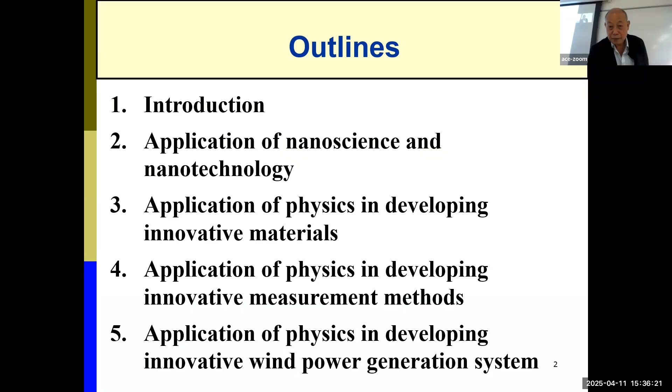Okay. So we know many English words come from Latin and Greek. Physics is from ancient Greek, and the meaning is knowledge about nature. Of course it is a natural science, not a social science, and specifically it studies matter and its motion through space and time. So physics is mostly related to energy and force.

We know that big achievements of human beings come from theoretical breakthroughs in physics. Here are a few examples. The electromagnetic theory let us develop TVs, computers and electricity generation, from the fundamental understanding of electromagnetism. For nuclear physics, with good understanding we developed nuclear weapons, and also nuclear power plants. And recently we have so-called man-made fusion reactions of atoms. For mechanics, we have calculus, based on developments in physics.

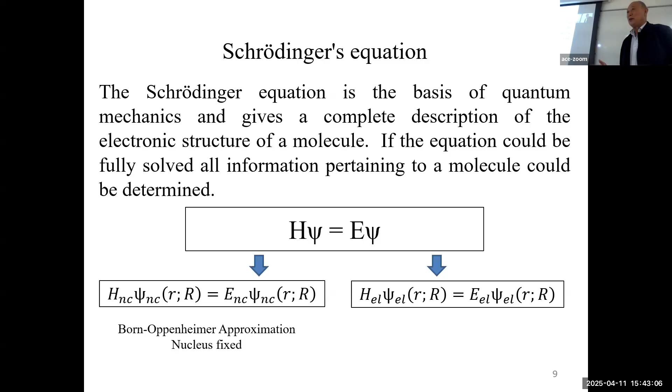So for the atom, we can divide this equation into a part regarding the nuclear core and another regarding the electrons. Compared with the electrons, the nuclear core is huge and very stable. So most of the calculation is focused on the electrons. However, there's still a problem even if we separate the nuclear core and the electrons, because the wave function is a function of 3N variables, where N is the number of electrons.

So it's very complicated. Over many years there were many methods, using matrices, but they could not give a very good solution. Until, in the 1960s, a new theory was developed, called density functional theory. This theory simplifies the electron calculation into the electron density. In this case, you reduce the 3N variables into 3 variables, x, y, and z. Of course, we ignore the spin of the electrons here.

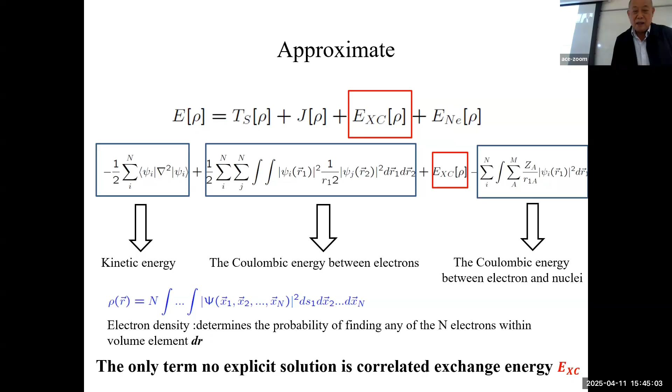When we calculate the energy, we divide it into 4 parts. Three of the parts are the kinetic energy and the interaction energies between the electrons, and the only unknown is EXC. So we have to resolve this so-called exchange-correlation energy. There are basically 2 ways, one local, another more global: we have LDA and GGA. So there are 2 approaches to solve for EXC. Once EXC is obtained, the problem is resolved. So this is some very fundamental knowledge.

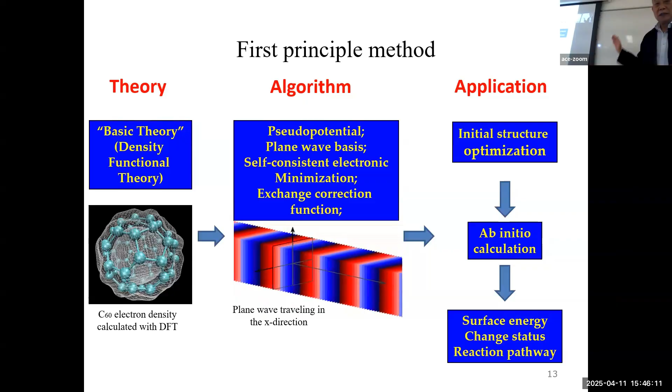Currently, we can use the theory called DFT, and then use some algorithms, including plane waves and exchange-correlation functions, to get the initial structure optimized, and then we use the ab initio method to do the calculation. Finally, we can get the surface energy, transition states, and the reaction pathway. So this is the route for us to use quantum mechanics.

Specifically for civil engineering, we are mainly concerned with how to establish the CSH using atomistic structures with ab initio simulation. We see this cement component, especially C3S, which is calcium silicate. When it mixes with water, the water will be attached on the surface - we call this adsorption. After adsorption, the oxygen in the water will pull the calcium ions from this C3S, and meanwhile some hydrogen or protons get in, so we can form CH in the solution and CSH on the surface of the C3S.

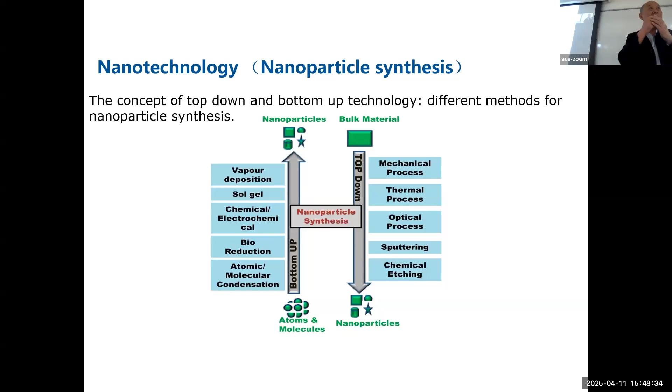That's about nanoscience. Now we talk about nanotechnology. In nanotechnology, one of the big tasks is to produce nanoparticles. There are two ways to do this. One is top-down: you have a large size piece, and use mechanical, thermal, optical, or chemical methods to change the large size into a very small size - we call this top-down. The other is bottom-up, where you start from atoms and molecules, also using chemical methods, to assemble atoms and molecules into nanoparticles. So basically we have these two approaches.

How about for concrete engineering? We say concrete can be nano-engineered. When we talk about engineering, that means you do something on purpose. So nano-engineered means we do something at the scale of nanometers. How do we do this? Usually we can use a nanoparticle, and then use that to react with the hydration products. After the reaction, we will change the material structure from the original hydration material structure. With this change of material structure, we can improve the mechanical property. So basically nano engineering for concrete is doing things like this.

Currently we mainly have nanoparticles such as nano-silica, nanotubes, carbon nanotubes, nano-titanium, graphene, and also monomers. Monomer is the organic material before polymerization - it's very small in size. We'll give one example to illustrate this.

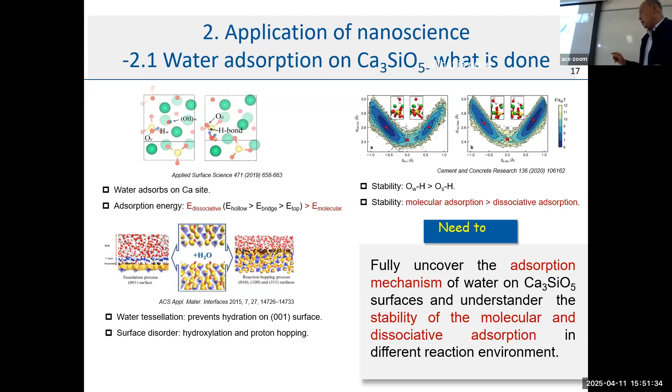Now, as I said in civil engineering, one of the big targets of nanoscience is to reveal how CSH is formed. For the formation of CSH, there are many steps. The first step is when water contacts the cement particles, the water molecule will be adsorbed on the surface. There is much research on this, but it's not very complete. In my group's study, we are trying to fully uncover the adsorption mechanism of water on the C3S surface and understand the stability of molecular adsorption versus dissociative adsorption. I will talk about this.

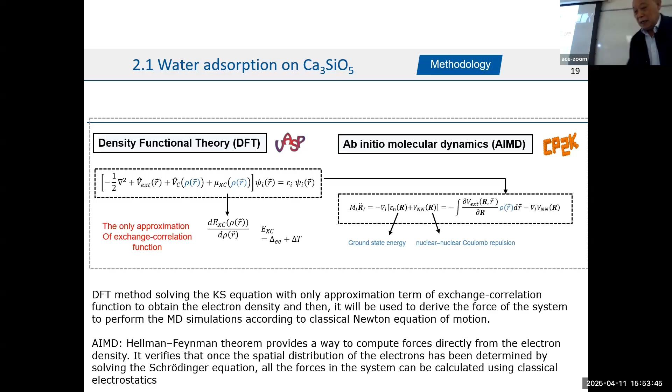As I mentioned, we utilize quantum mechanics. However, to increase the number of atoms, we extended this into MD, molecular dynamics. We utilize DFT, with software called VASP. We use that to get the potential. This potential has the accuracy of quantum mechanics. So we use that potential in the MD simulation - we call this AIMD, or ab initio molecular dynamics. This means more atoms can be put into the system, but you still have the accuracy of quantum mechanics. So by utilizing this, we first studied different types of adsorption.

Dissociative adsorption means the water molecule is separated into H and OH, and adsorbed separately on this surface. Molecular adsorption means the whole water molecule is adsorbed on the surface of this C3S. So we have already studied what is the strong adsorption or the weak, and what characteristic it has.

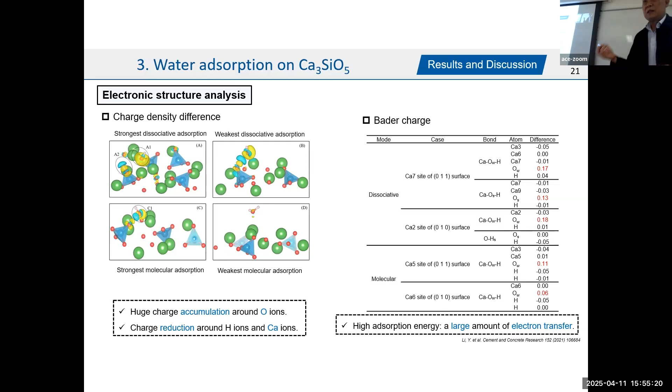I use this the right number listed here. So this is a fundamental mechanism for this.

And then we can see for the adsorption of the water, basically after it clicks on the surface, there's a change in the energy, but this overcomes this energy barrier, and then you can move to the next step, and then finally you got the molecule adsorbed on the surface. So after that, we studied the dissolution of this calcium into the liquid.

So the dissolution of the calcium, well, we can see, for example, we know that the limestone, if you go to the cave, you know there's a dissolution. You have the water drop with the calcium inside, and that's how it formed this. And we have the drug release. There's many things regarding this.

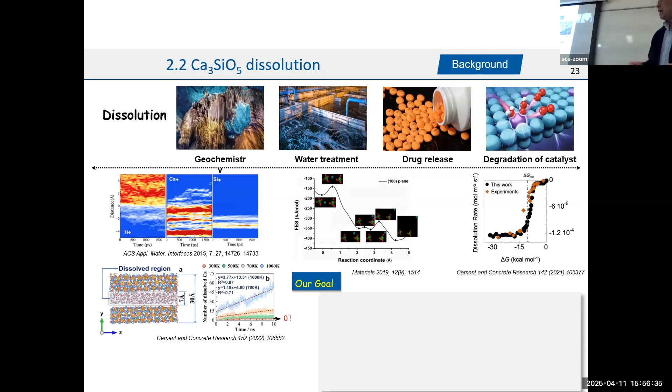However, what we are trying to do is for the cement material. So we want to simulate this complete and more realistic process of calcium dissolution from this C3S surface, and then we quantitatively calculate the thermodynamics and kinetics properties of this.

To do this, in addition to these two software, one is CP2K, we need one more, because for CP2K, they cannot pass this higher energy barrier. So we need a so-called metadynamics, meta D.

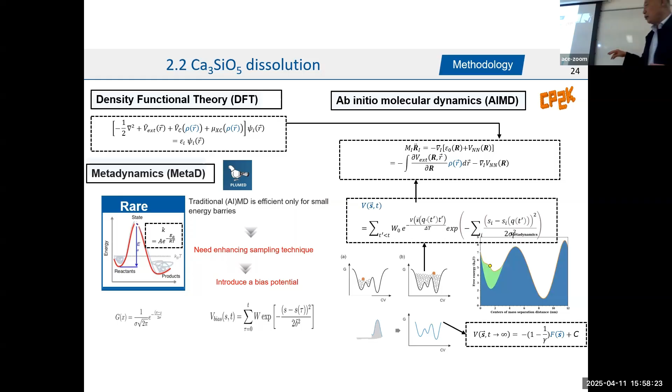So in this metadynamics, there are two things. One is the sampling rate - they increase the sampling rate, so every smaller delta they have is the sampling. And the second, they provide a so-called bias potential and put this potential into the AIMD. So with this bias potential, originally, for example, you have the ball in the valley that cannot cross over this peak, but with this bias potential, the reaction can happen, so they can go cross this energy barrier.

Calcium alpha means there are still three oxygen from C3S connected with calcium, and the rest is from the water. So we can calculate from a different state.

So here you can see we go from A to B. So from there you can see originally it has three oxygen from the C3S connected with the calcium, and two from the water, and then after they cross the barrier between A and B it becomes stage B - they have one more oxygen from water. Gradually you have an increase to four, and then the connection of this oxygen from C3S with the calcium reduces to 2 and reduces to 1, finally dissolved.

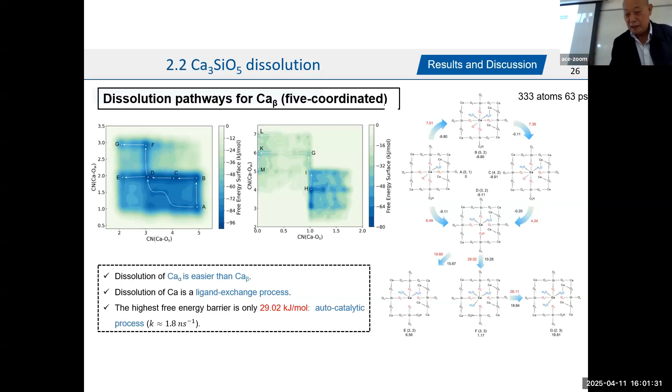And this graduate mentioned, from adsorption, there's a connection with the oxygen from the water, and with the increasing connection of oxygen from the water, the bond between the oxygen from C3S and this calcium breaks, and finally they move out. So this is the process.

So after this calculation, based on my understanding, the CSH should be formed on the surface of the cement particle. We have a lot of examples from experiments. For example, this is a photo from one of my students from HKUST. He took a very nice image after hydration, where C3S particles are still there, and outside we have so-called internal CSH, and outside that is outer CSH.

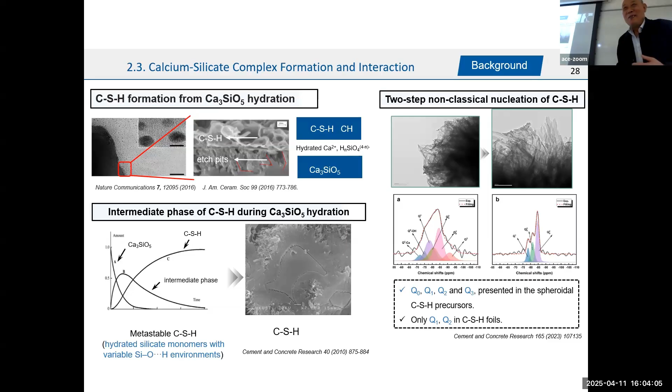So there's some TEM, they change from this. According to the arrangement, my students tried doing the calculation concentrating on the C3S surface, but it's very difficult. So my students at that time got another way - he did the calculation for the assembly of calcium and silicate.

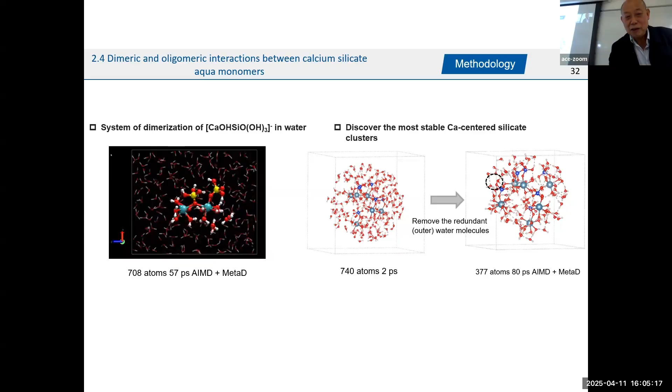There's a meaning here. We know we have the so-called secondary formation of CSH, the pozzolanic reaction. In that case, it's exactly like this - you have an assembly of calcium and silicate. I said your work is also good, but not really for the CSH formation on the surface. So he did this, and also found two very stable combinations of calcium and silicate, and also they continue to let this combination of silicate and calcium join together to form the so-called secondary CSH.

This part I'm going to utilize because currently we need to reduce carbon dioxide. One way to reduce carbon dioxide is to eliminate Portland cement. But if we eliminate Portland cement, we need a binding material. So we can get calcium and silicate from natural sources, and also from industry waste, and then use this reaction to form so-called secondary CSH. This is still good, but I still ask my student to continue to work on the surface reaction, so that will be more realistic for the formation of this.

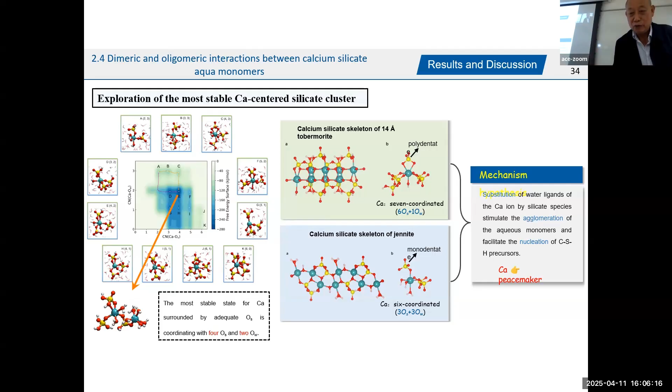Now I move to nanotechnology. At the beginning, I said there are many ways to get a nanoparticle. How about for our civil engineering - can we have some innovative method to get nanoparticles? The answer is yes, very simple.

You put cement particles into a large amount of water, and then control the environment of this reaction - for example, temperature very close to zero. And then we found the cement particle can release the calcium ion, just like we discussed earlier, and finally they can form very small calcium hydroxide - about 5 nanometers, and very uniformly distributed in the solution.

Very good, and we tried this with magnesium, and also found a similar phenomenon - we can get about 2 to 3 nanometer particles from this magnesium. So we said this is a reliable method, and we can use it to produce nanoparticles using common cement particles. And this is very cheap, very simple operation.

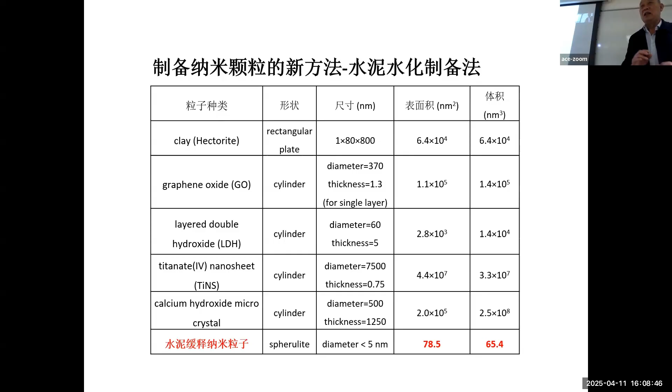So someone asked, if you got this, do you have any big advantage? So we compared with other nanoparticles, and we found the surface area is the smallest, and the particle volume is the smallest. That means for the same volume, we have more of this cement-produced nanoparticle - more particles, and more effect in restraining or reinforcing the material.

So we are utilizing this generated nanoparticle. First we did research to produce a material called hydrogel. The hydrogel is basically a kind of polymer with water - about 80% water, 15 to 20% polymer. Before this polymerization, we utilize the monomer and initiator, and let them combine with the generated nanoparticle. So we produce this kind of hydrogel.

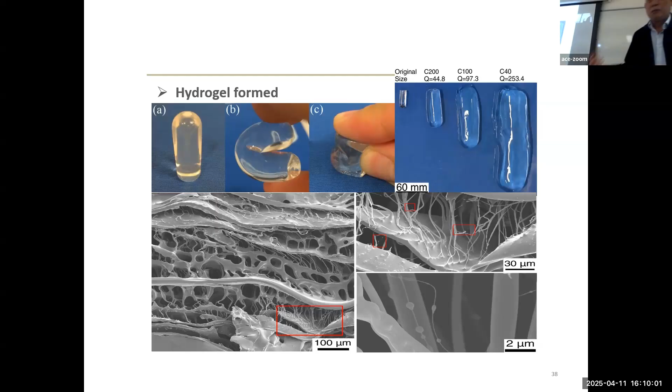And these are some photos. You can see it's very transparent, and the microstructure is great. You can also find some in the strings, some small ones. You see the joint? This joint is made by this nanoparticle. It is amazing. Okay, after we utilize this nanoparticle to reinforce this hydrogel, the mechanical performance is exceptionally good.

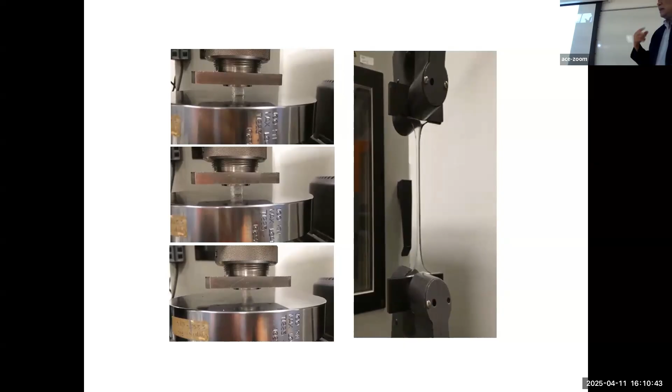So on the compression side, we have three. The top one is hydrogel without any nanoparticle. The middle one is with nanoparticles we purchased from a commercial source, so this is kind of inorganic. And the bottom one is the hydrogel reinforced with our cement-generated nanoparticle.

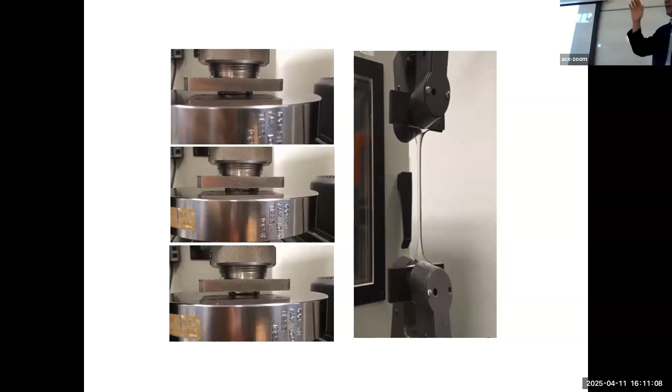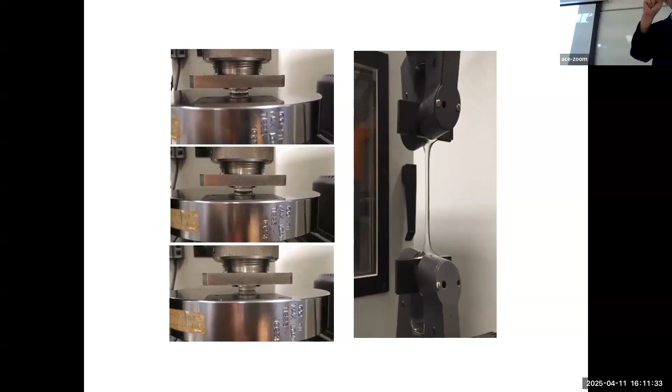If you pay attention, for the top one, when you compress, it becomes very thin, but when you remove the force, it cannot recover. That means it completely lost its elasticity. For the second, after removing the force, all the hydrogel was broken. It's very brittle. Only the bottom one, after you remove the force, recovers to the original shape. So that means it has very good elasticity.

And for the tension side, we found the maximum tension can be 100 times the original size. You can see it's without breaking. So this is very good elasticity.

We have an article published in Nature Communications. We compared with hydrogels reinforced with other nanoparticles. You can see with our cement-produced nanoparticles, the amount we utilize is small, the strength improvement is almost the highest, and the elongation is the highest. So that means we have good results utilizing cement-produced nanoparticles to reinforce the hydrogel.

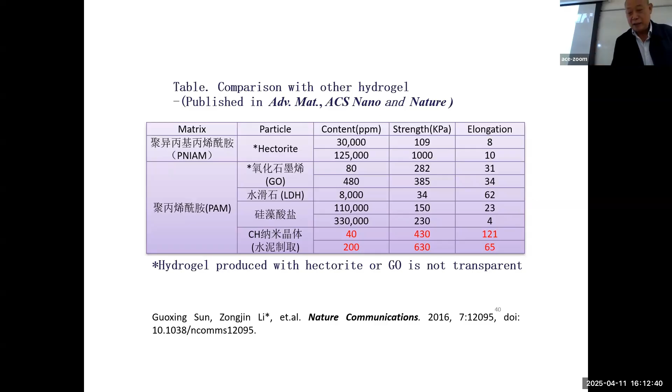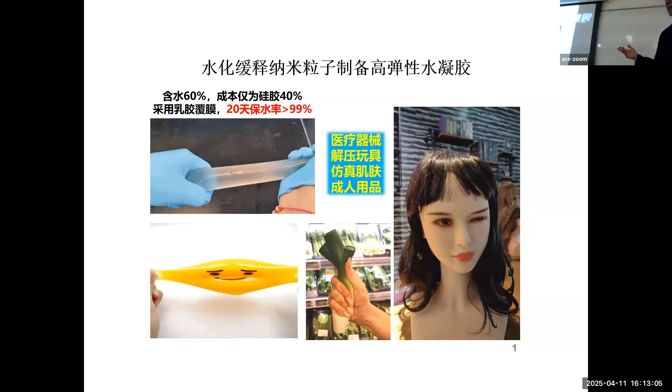So currently we are utilizing this kind of hydrogel for applications. One of the applications is medical and also some adult products. In Dongguan and elsewhere, there are factories that produce these. Currently they use some other material, and what they found is our material is much cheaper and has better elasticity.

And another, we use this hydrogel to produce a super absorbent material. The highest absorption for the hydrogel we produce with this nanoparticle is 13,000. That is the highest we found in the literature, about 2 or 3 times what was reported.

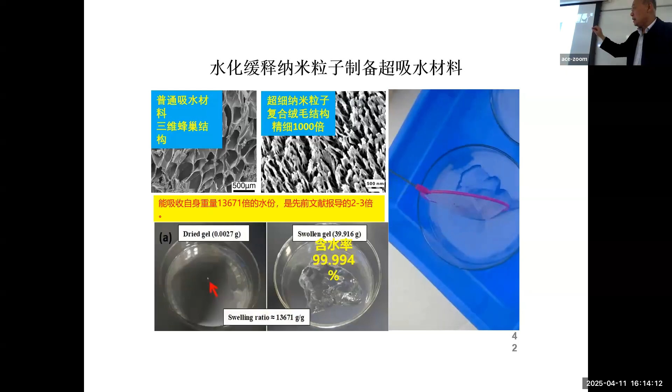So why can it have this? Because of the microstructure. You can see they have a very special kind of villi and something like hair growing on it. That helps the absorption.

So one application is that we can use it for soil improvement. We put in our generated hydrogel, the commercially available gel, and some without treatment. You can see our hydrogel keeps about 40% of its water in 6 months, but the others don't.

And also for the plants, without the hydrogel, it's basically very difficult for the seeds to germinate. With the commercially available one it's only about 40%, but with our modified hydrogel it's about 100%. So this is that.

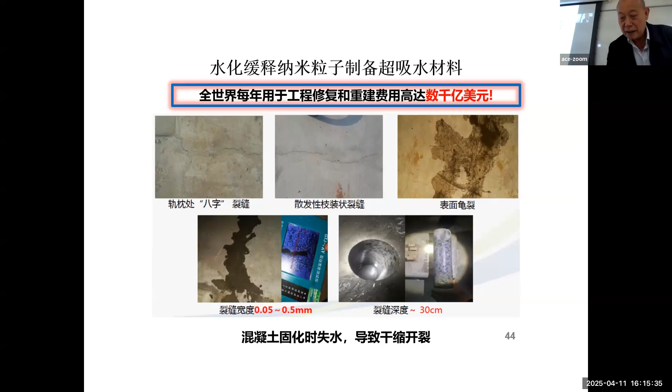And also we utilize this in our concrete, as an internal curing material. Because this material works not only for fresh water but also for salt water, it can absorb about 300 times.

So that's good. We did tests on concrete blocks. At 2% addition, the final strength loss is only about 9%, but for the commercial products it's about 20. And also we can reduce the shrinkage by 20%. The commercial products only 5.5%.

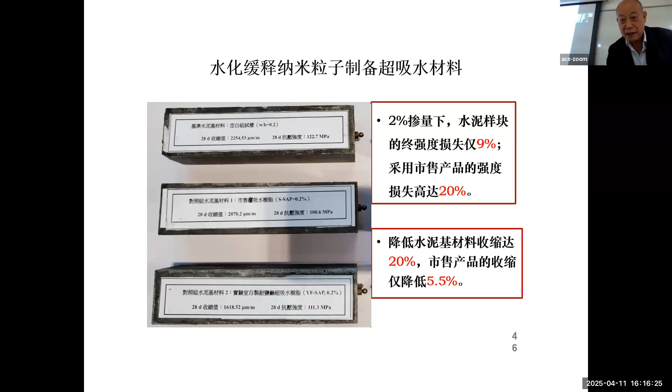So we are currently also pushing the application of this in the home. And also we utilize this kind of gel to produce other products for applications.

For example, we have this heavy metal adsorption, and use this for non-contact transducers, and we have this kind of high elasticity, but with oil replacing the water, for applications like base isolation, and we also use that for the growing of cells. So the result is also good, because it can be a soft organ for the human being. Okay, so this is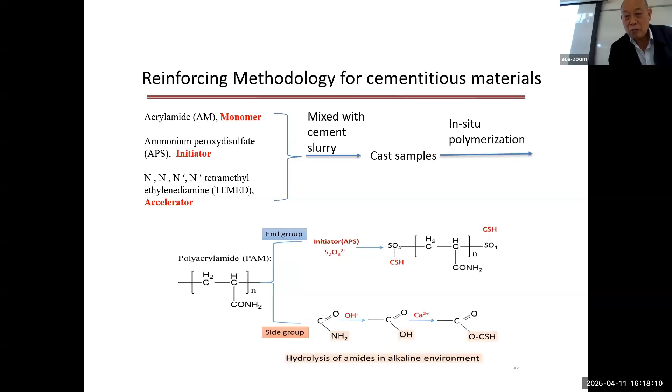Now on the other side, we used nanoparticles to reinforce the hydrogel. Now we use that to reinforce our cement-based material. So we did the same thing. We put the monomer, initiator, accelerator, and we mix with the cement slurry and cast samples. And during the hydration, we expect an in situ polymerization to happen, and then it can form a second network in the cement-based material. This is one of my students' PhD thesis. What he did was use 0.3%, 0.6%, and up to 5% of the monomer.

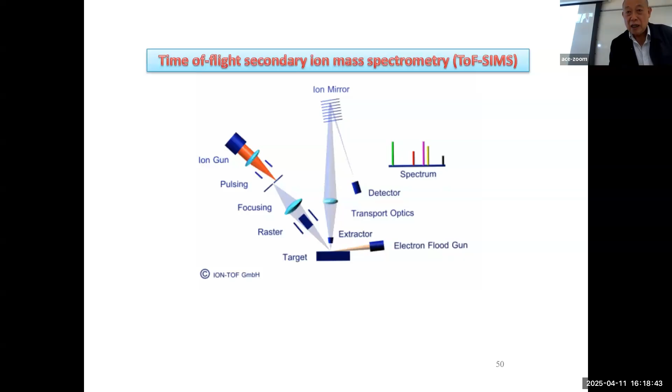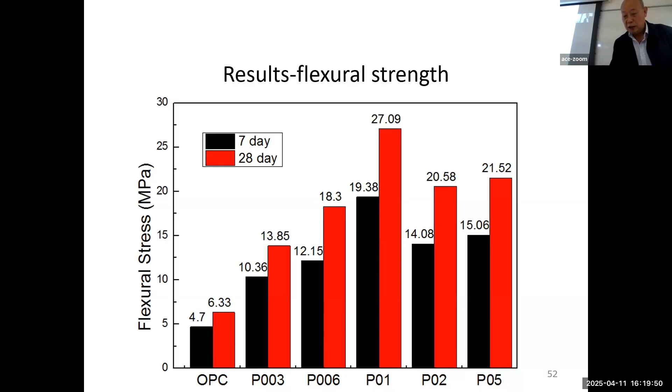And then we did the flexural test. You can see the best result we obtained is about 27 megapascal at 28 days, and for the reference it is only 6, so it's very high. And meantime, there's not much reduction in the compressive strength.

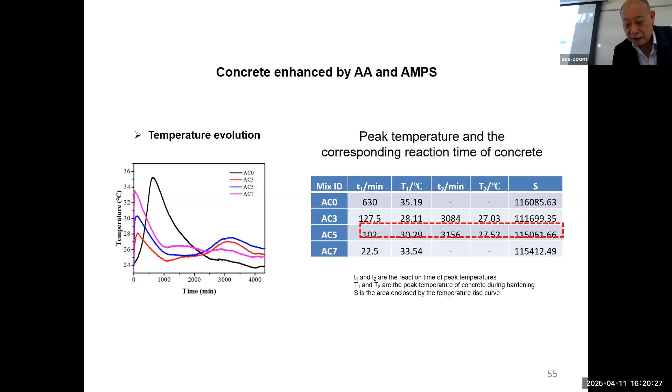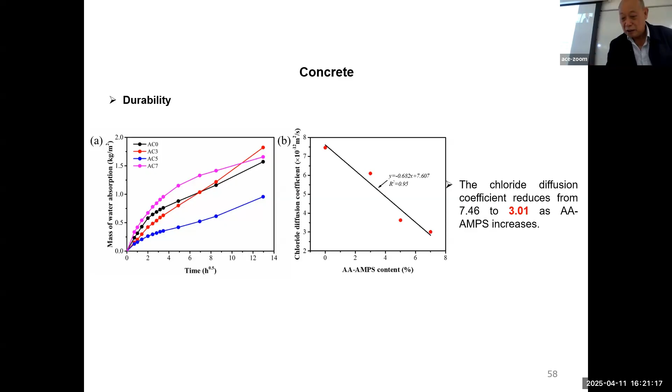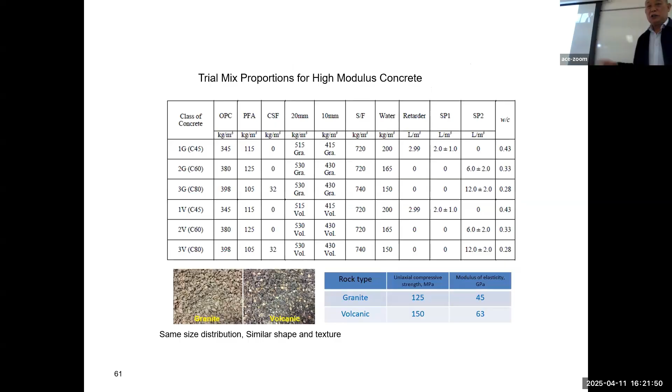Okay. So next I'll talk about high modulus concrete. This is one I did at HKUST. What we did was add nano silica into the concrete. We tried to produce concrete with high modulus. We started from this commercial mix design. This is from the government. At that time we were the partner. And then we modified that formula into this high modulus concrete formula.

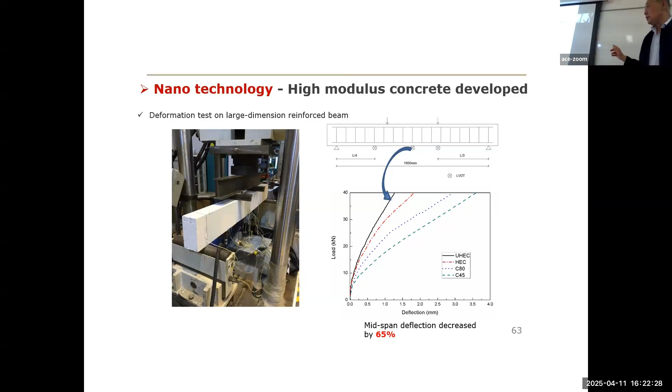And then what we found, by adding these nanoparticles, you can enrich the transition zone, and you can increase the modulus to about 53.5 gigapascal. And if you do the structural test, the beam midpoint deformation for the high modulus concrete is about 1/3 of the normal concrete. So here is a video.

Construction of tall buildings is an unstoppable trend all over the world in recent several decades, especially in Hong Kong. In 2017, Hong Kong is ranked #1 city by number of 150-meter or higher completed buildings, 25% more than the second, New York City. One major driving force is the limit of available land. Therefore, the city expanded vertically, which requires a rigid structural frame to sustain lateral loadings like wind loads. If we look at the materials used for construction of tall buildings, 85% are using concrete.

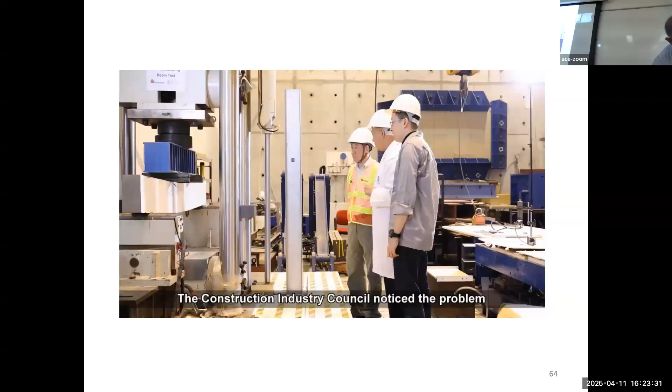When designing tall buildings, structural engineers have to use large cross-section area of beams and columns to control the structural deformation. The Construction Industry Council noticed the problem and spotted the significance of concrete technology. They sponsored a research project on the development and application of high modulus concrete by Gammon Construction Limited and the Hong Kong University of Science and Technology in 2013. Concrete has two important properties. One is the strength, especially the compressive strength. Another is the stiffness. Relatively, it's easier to develop high-strength concrete, but not high modulus concrete.

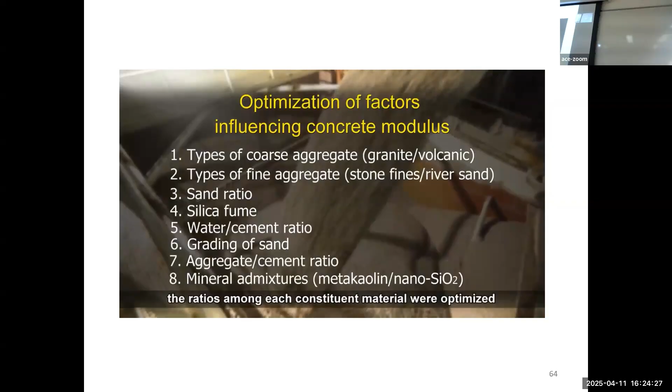However, concrete modulus increases to a much less extent than compressive strength according to the Code of Practice for Structural Use of Concrete 2013. This study is quite challenging. The first stage of this innovation is to optimize mix proportions for high modulus concrete. A new type of crushed rock aggregate was identified, and the ratios among each constituent material were optimized.

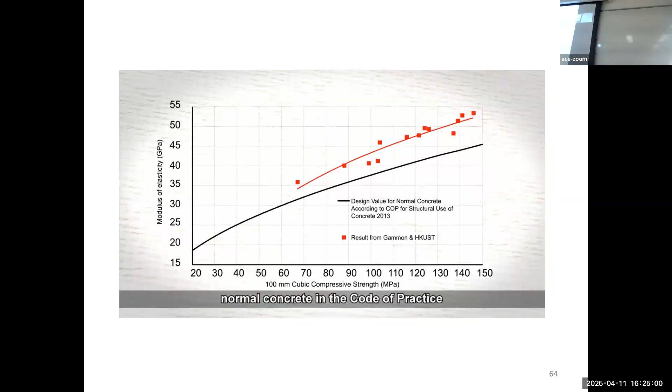To improve concrete properties and enhance mixing efficiency, ultrasonic mixing technique was firstly applied in producing concrete. It is clear that the interfacial transition zone between aggregate and cement paste becomes much better after ultrasonication during mixing. High modulus concrete, developed by Gammon and HKUST, has 20% higher stiffness than normal concrete in the Code of Practice. Therefore, up to 20% materials can be saved to maintain the original structural stiffness.

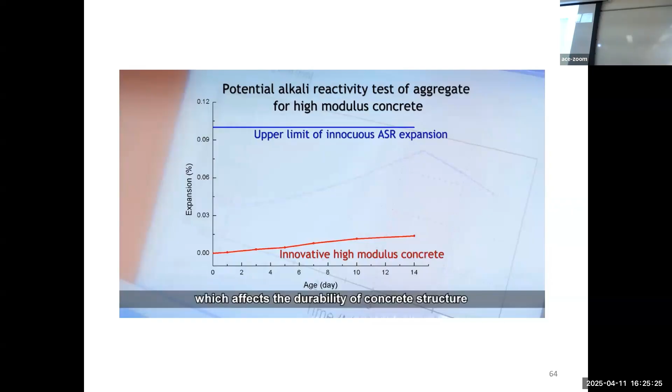It also shows excellent dimensional stability properties in both early age and long term. Shrinkage, creep, and weight loss all decrease compared with normal concrete. Besides, selected rock type does not have alkali aggregate reaction risks at all, which affects the durability of concrete structure. Large-scale beam test results indicate that high modulus concrete leads to near 55% reduction of mid-span deflection. It verifies the advantages of deformation control.

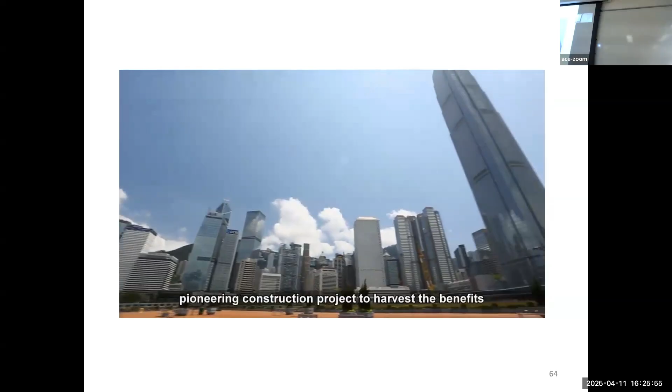High modulus concrete has proved workability, mechanical, chemical, and durability properties, and is ready for structural engineers' design and industry scale. CIC is also ready to lead us to carry out pioneering construction projects to harvest the benefits in the sense of sustainability and for a sustainable built environment.

In building design, we had to control deflection of the buildings. If we would like to use such kind of concrete, eventually the cross sections, such as columns and walls, will be greatly reduced, thus saving a lot. Overall, 15 to 20% materials can be saved if this high modulus concrete is utilized for tall buildings. It is bringing tremendous benefits to construction sustainability and will lead to an unprecedented revolution in construction industry.

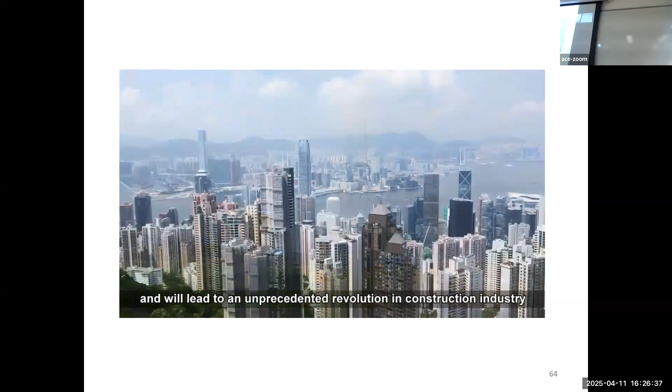So next we talk about how to use this physics law to develop the innovative material. So this is the so-called external wall system produced. Basically it is composed of two parts. One is inorganic reflective heat insulation coating. Another is a structural heat insulated wall panel with the addition of the PCM.

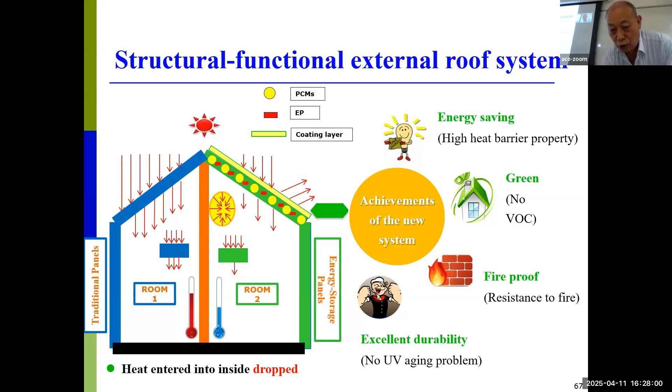So, for example, we produce a roof. First we have the coating: when the sunlight comes, most of the heat is reflected. And second, we have the panel with the PCM inside, so it can store some latent heat and reduce the heat going into the room, so we can keep the cool temperature inside.

This reflecting material we developed according to this equation. We have N1 T1 plus N2 T2 equal to lambda over 2. N is the refractive index of the material, T is the thickness. So when we design the material, if we get many layers that satisfy this formula, light with wavelength lambda cannot penetrate.

We have a 150 diameter concrete cylinder, made hollow inside with a 100 millimeter mold. Then on the surface we use different coating materials, and we use infrared to shoot and measure the temperature inside. The results were very good. The highest improvement we get is 41%.

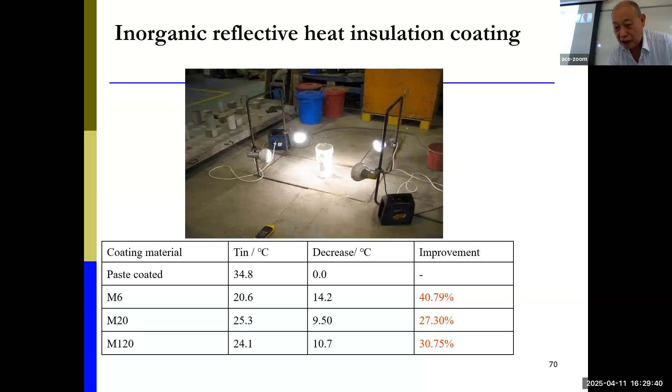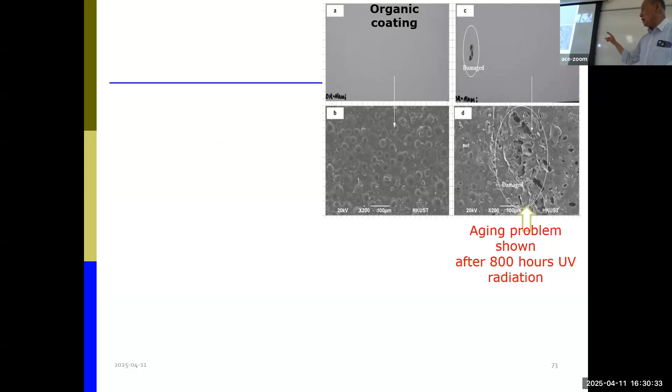They also showed the bonding between the coating material and the substrate, and we did the UV test. For the material with organic content, you can see it has very heavy damage after 800 hours of UV radiation.

But for our material, there's almost no change after. So we did some site tests. In Hong Kong, construction sites mainly use containers as the office. So this is on the construction site. We did a measurement, one with our coating, another without. You can see for about 3 months with the coating, about 552 kilowatt-hours. So that's quite good, the saving for that.

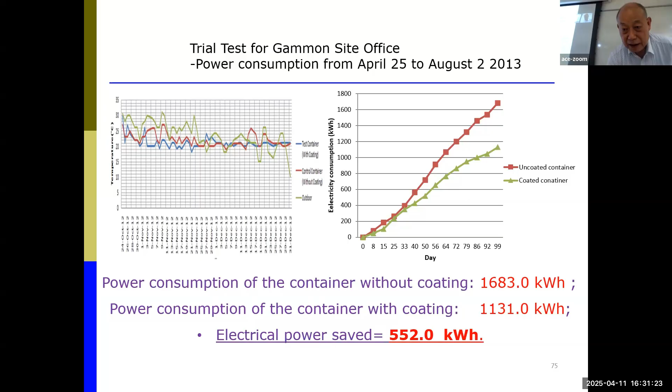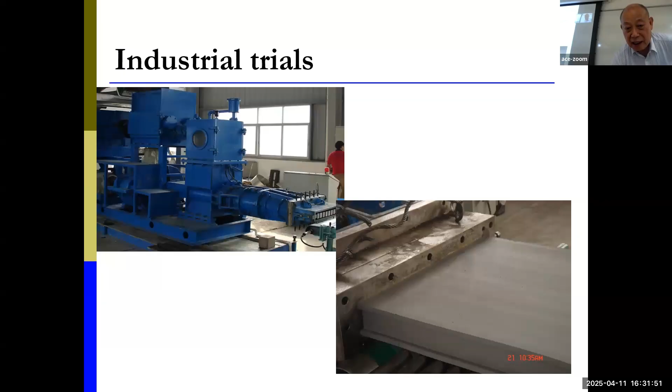And then we developed this kind of extruded material, and we add this PCM. You can see you can reduce the temperature difference between the internal and external. And also we have good bending strength, more than 2 megapascal. We had some manufacturer trials and did some design for the real structure, like currently for the MTR.

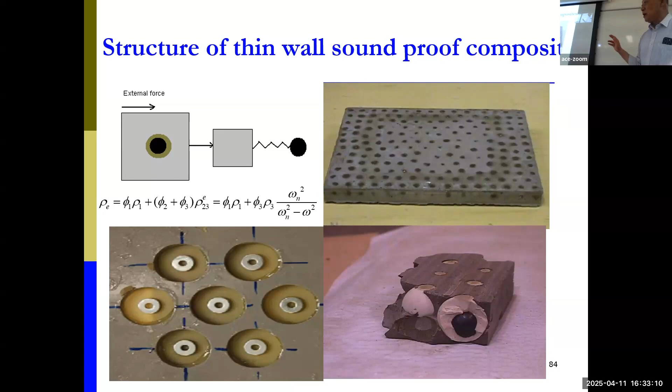Now we talk about the sound insulation material. We know sound is very difficult to block for low frequency because of the mass law. For low frequency, the thickness of the wall must be increased to block this kind of wave. However, at HKUST, we developed, according to physics law, a composite material, and with different compositions we can tune the effective density of the composite material. This density depends on the frequency of the penetrating wave. So by adjusting this, we can get almost zero or negative effective density, and then the wave corresponding to that frequency cannot penetrate according to this physics.

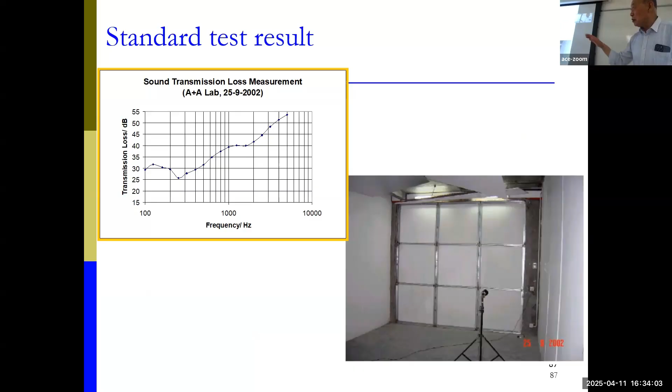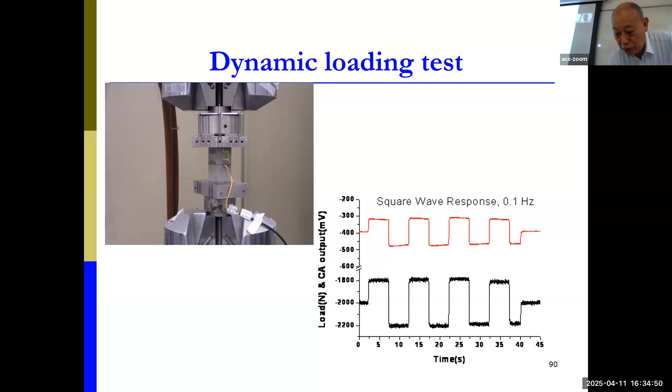Then we have the cement-based material. This work we also developed for many years. Basically, we use powder from piezoelectric material mixed with cement, and then we produce this transducer. You can see it follows the force very well. On the top, the red square is the signal output of the transducer, and the bottom, the black, is the force applied by the MTS. We also put the transducer into a reinforced beam, and used 4 different frequencies and 4 different amplitudes to generate this zigzag load pattern, and we found the transducer inside the beam can follow exactly the pattern of this loading. So that means it's very reliable.

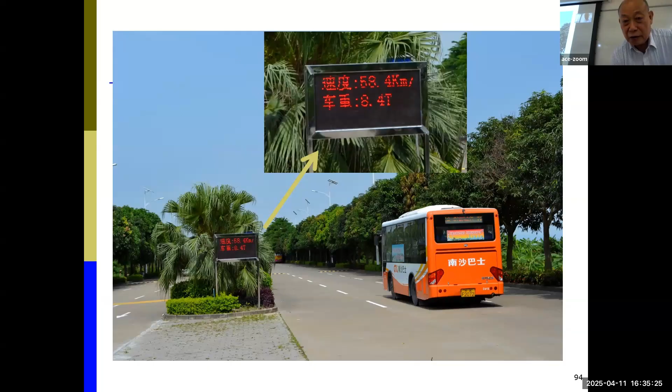And we used that for highway traffic monitoring, so when a vehicle passes through it can give the speed and the weight. And also we utilized this for high-speed rail crack detection, because high-speed rail has very long turnouts, 80 to 100 meters. So they are very afraid that any crack will create a safety problem. This project was originally with Xinan Jiaoda and PolyU, and they met a lot of difficulty. They called me, so I said, okay, we can use our transducer to try. And then we put the transducer on, and found it's really very good.

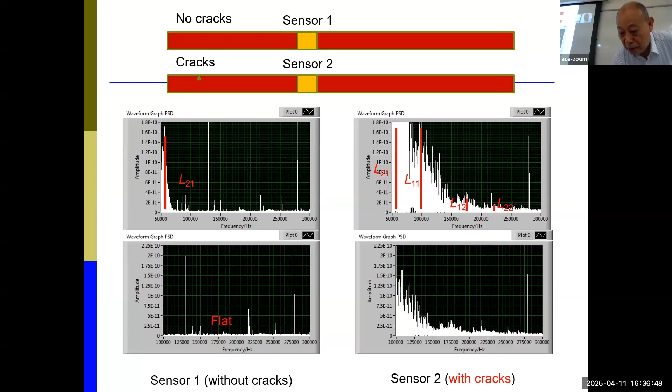For these two spectra, one is without crack, another with crack. You can see they're quite different. And then we utilize this L11 to indicate there's a crack. So finally, they passed the examination from the railway department, the Ministry of Railways at that time, before it became a company, and now it produces the product for application in the whole of China.

And this measurement is called non-contact resistivity measurement. Because sometimes we need to measure the resistivity of the concrete, because it's a porous material, and use the resistivity to interpret the concrete property. Before, it always used an anode and cathode, selected electrodes, and with this contact there's a lot of problems. At least you cannot get accurate results.

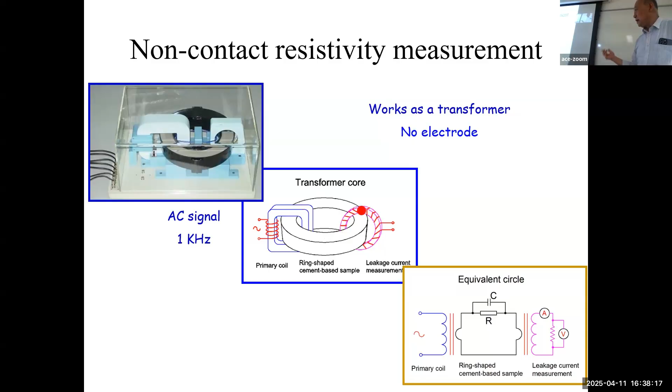So I developed this non-contact method based on the electromagnetic mechanism. Basically, we have something like a transformer. We have this iron core, and it can generate a magnetic field in the core, and this magnetic field can generate an electric field in this circular ring. This circular ring is produced by the concrete or cement-based material, and then we use the non-contact current meter to measure current, and then we can calculate, so the whole thing has no contact.

So my first PhD student used this to get his PhD degree. What he found is this method is very reliable. For the cement paste with 0.3, 0.4, 0.5 water-cement ratio, they have a similar resistivity-time curve, and they all have this lowest point. Later on, we interpreted the lowest point as in fact the starting point for the hydration.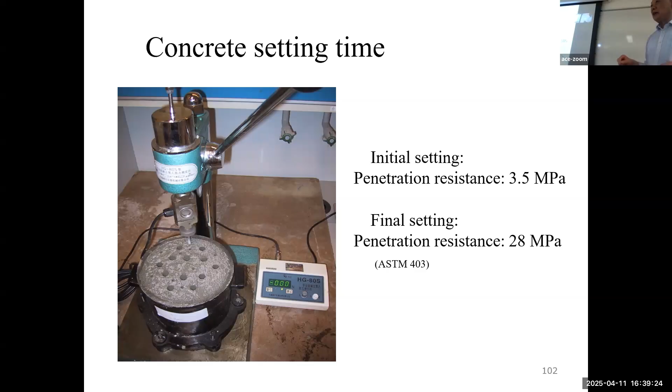And then the second PhD student did this. The main contribution of her work is she utilized the non-contact resistivity to indicate the setting time for concrete, because setting time for concrete is very difficult. You need to sieve out the coarse aggregate, only keep the mortar, and then do penetration. So it's very time consuming and labor consuming. However, by utilizing this non-contact method, if we use the characteristic two points, we can predict very well the initial and final setting time for concrete.

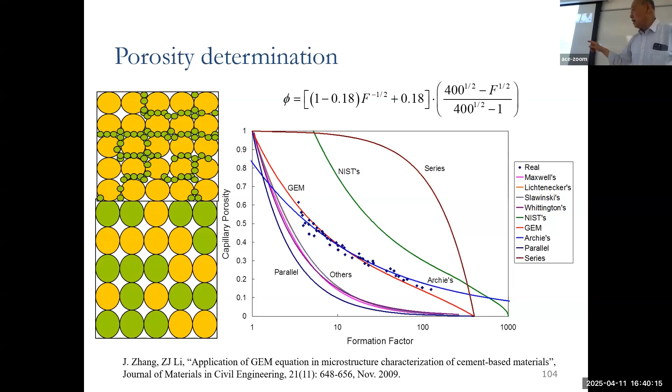My third student used this technique to measure the porosity inside the concrete, the total porosity. That's the formula he developed, and F is a factor we call the formation factor. That is the ratio of the resistivity of the concrete to the resistivity of the solution at that time. The prediction is very accurate. You can see the red curve is our prediction. All the dots are experimental results from many different research.

And later students used this technique to measure the Nyquist plot for cement-based material. A very good thing you can see is that all the plots go to zero because there's no contact, so there's no capacitance effect, so it can go to zero. Okay.

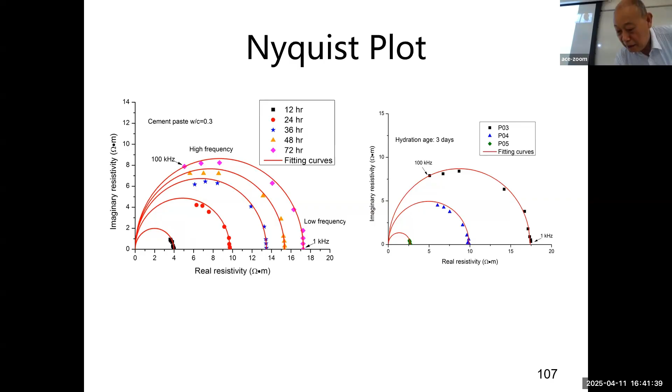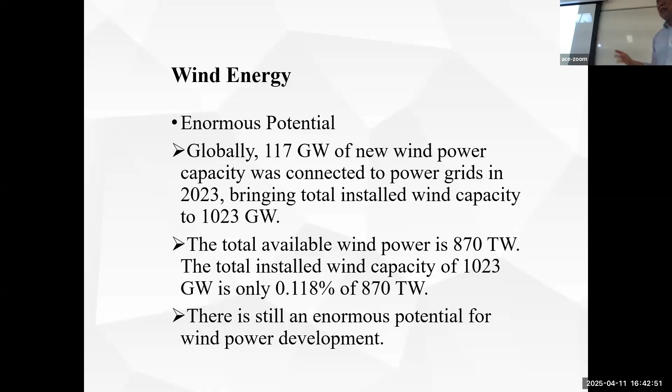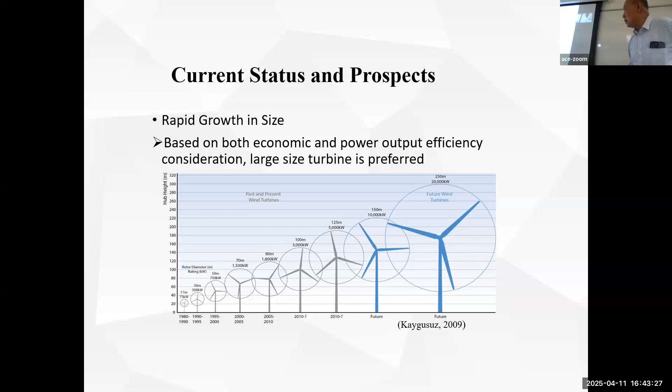Okay. So to increase wind electricity, we need to increase the wind turbine size. Here we show two different types. One is the horizontal axis, another is vertical axis. This is the trend for the size increase. You can see currently the diameter of the blade sweep can reach about 250 meters.

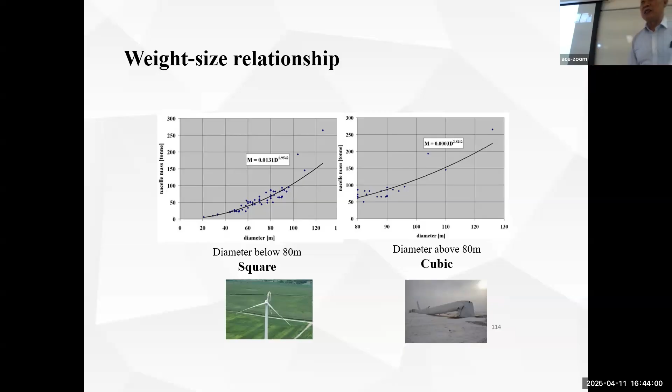So by increasing the size, the problem is that the vertical weight also increases, with a cubic relation. When you increase by 1 meter, from 80 to 81, the weight will be the cube of 81. So that is a very big burden for the material, especially for the bearing.

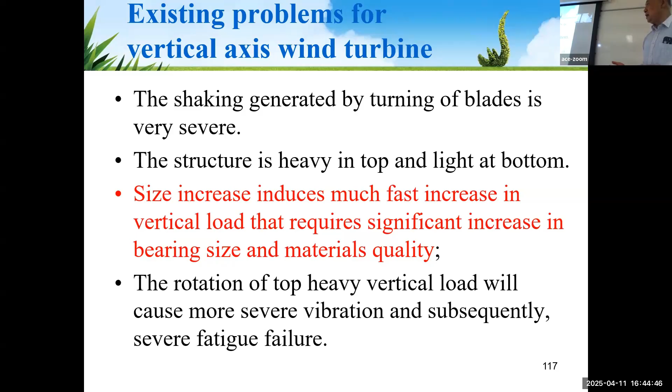So the vertical axis wind turbine currently has very small commercial application. What is the reason? Because this vertical turbine can generate very heavy vibration, and this vibration can cause fatigue and many problems. So if we can resolve this problem, we can develop this vertical wind turbine because it has a lot of advantages. So how to resolve this? We developed a new kind of structure for the vertical wind turbine.

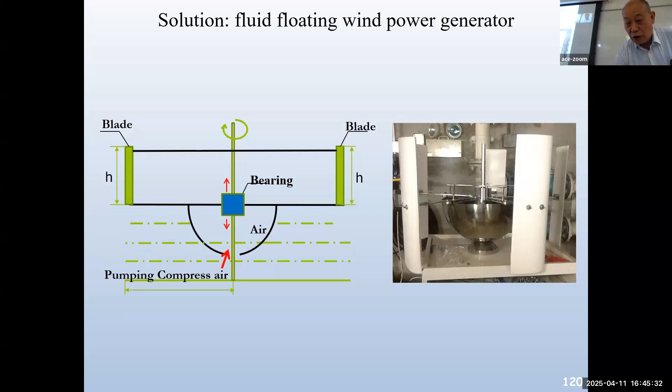So you can do a simple test. Even you can use it to rotate, and with this, you can see the electricity generated.

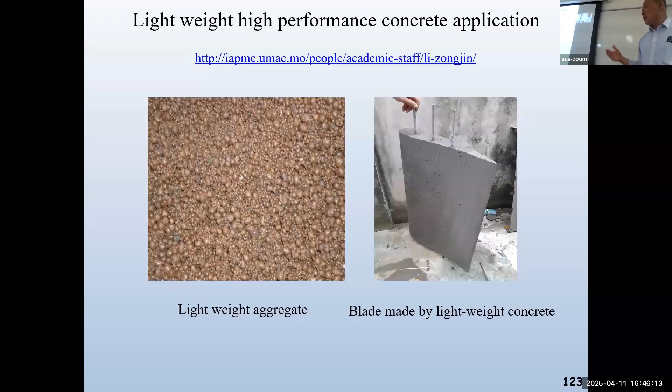When I used to give a talk on this, people always asked me, 'Professor Li, you are the concrete guy, why are you doing this?' I said, okay, we have to come back to the concrete. So how to come back? We use the concrete to produce the blade and the structural form. This is the structural form for this kind, because this new wind turbine gives us the possibility to utilize the concrete.

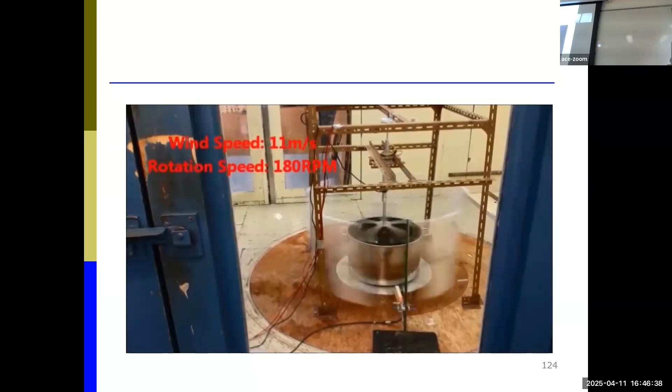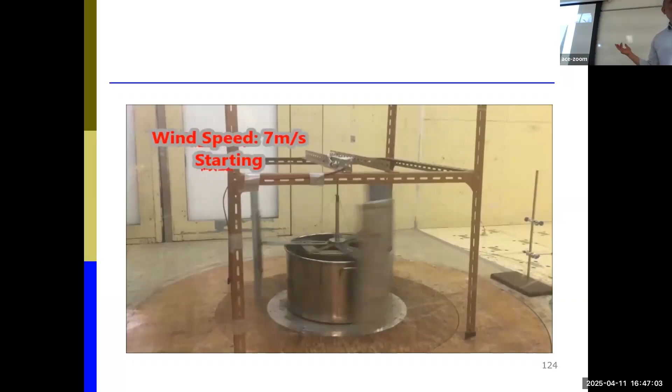So this is the wind turbine test we did at HKUST before I moved to UM. You can see very far, here comes the concrete, the concrete blade. It works also very well, it works very powerful.

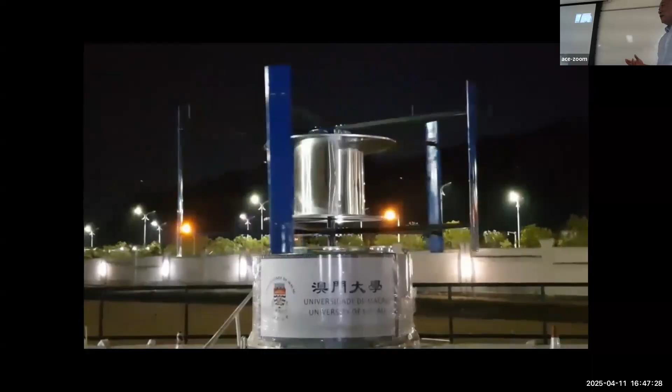And then when I moved to UM, I had the financial support to build up this wind turbine and put it into the campus. So after 5 years of operation, one of the good things I found is that this kind of wind turbine is very good for resistance to typhoons.

So why? Because when the typhoon comes, this just changes to rotate energy. So it does not go against the typhoon, but horizontally, they move like this way. So when the typhoon comes, for other turbines it's just against, and it's very easy to be damaged. But in our country, every year we have so many typhoons.

So if we utilize this for ocean wind electricity generation, then it has very good potential. So currently I still work with University of Guangzhou to continue this project. I hope in the future we can move this from the lab into the ocean for real electricity generation.